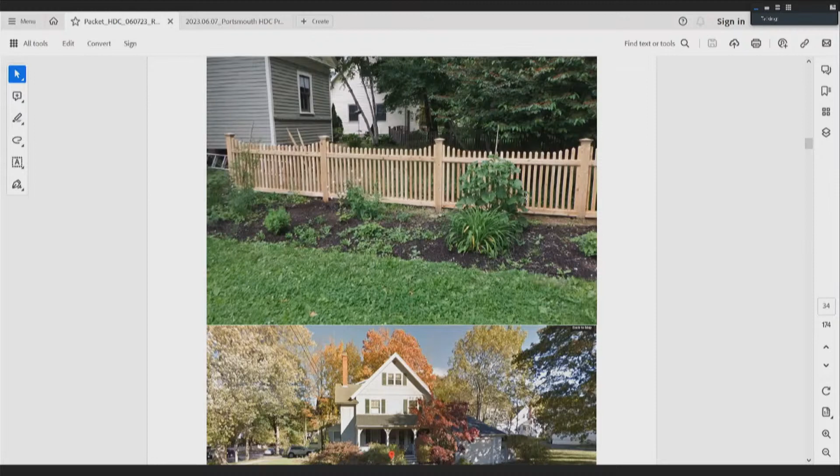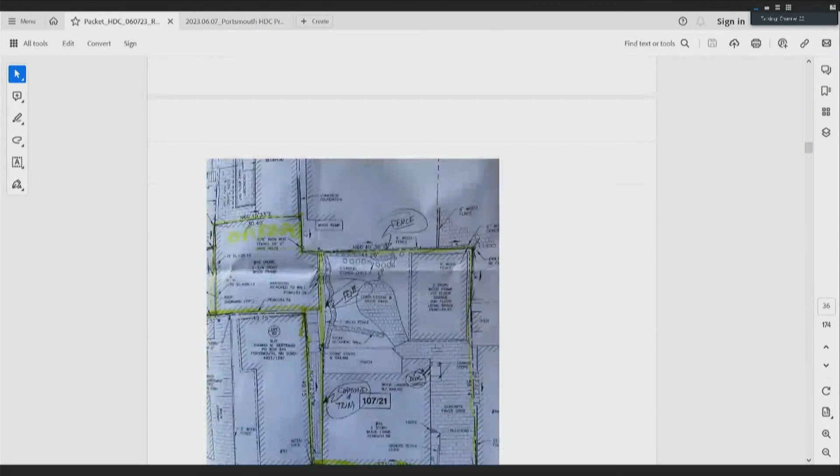Anything else? No. Okay, 49 Sheafe - I think the only real item on that list that requires approval is the HardiePlank on this side of the building, which is the narrow walkway between 49 and 43. I'm sure this door is being replaced, but I'm under the assumption it's in kind, given there was no alternative door shown in the package. They're replacing this broken section of the fence in kind with this tall picket style, but this is the cedar or pine clapboards on that sidewall that's within 3 or 4 feet at its narrowest, the building at 43.

Are they replacing those? No, they're wanting to put Hardie in there. Replacing it? Obviously, if you approve it, it should be smooth side out, I'm sure with the same profile. We should probably stipulate that. Yes.

The only other thing I would note is, we looked at the installation of some HardiePlank up on Prospect Street, and the installer did not do a very good job of randomizing - no running bonds, everything butted in. So if we could ask for a little bit of attention to detail to be paid to that. Will they be able to match the width? Because the exposure is tight currently. Why can't they do that? Hardie is usually 4. Because it's blind nailed - it's nailed at the top of the HardiePlank.

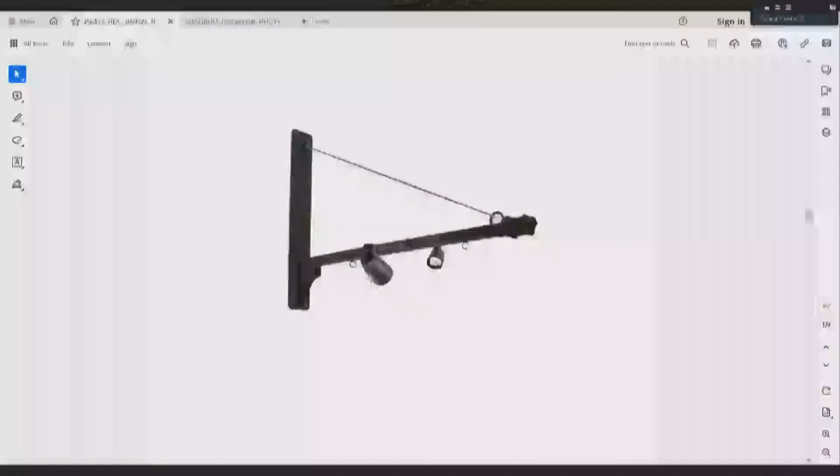Apparently this is a showroom for cabinet makers. I'm glad to see something finally going in there. Very interesting, it's sat so long, six years, nothing.

All right, I think for 135, Daniel, unless somebody's here in the audience for that, we should continue that to next week because I had requested an indication of where that vent is actually located, and what it looks like. I don't see it in the packet.

So 172 South Street is another mechanical condenser to get down there. I believe this one is proposed to be here underneath the existing stairs behind the lattice. Presumably they've already had that okayed by the plumbing inspector, but that's the location, on the side of the house here, and it'll be covered with the same lattice.

We'll write that down. Okay, that is 8.

Number 9, 11 Market Street. This is a condenser again on the back of this building with a conduit running up the brick in this alleyway that very few people see.

So presumably it would be conditioned to be painted the color of that brick wall. Yes, that's being replaced. So that's number 9. Sorry, take your time.

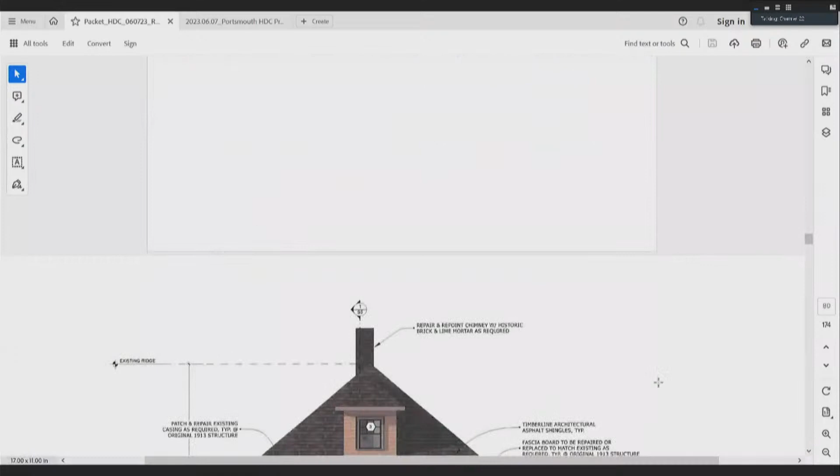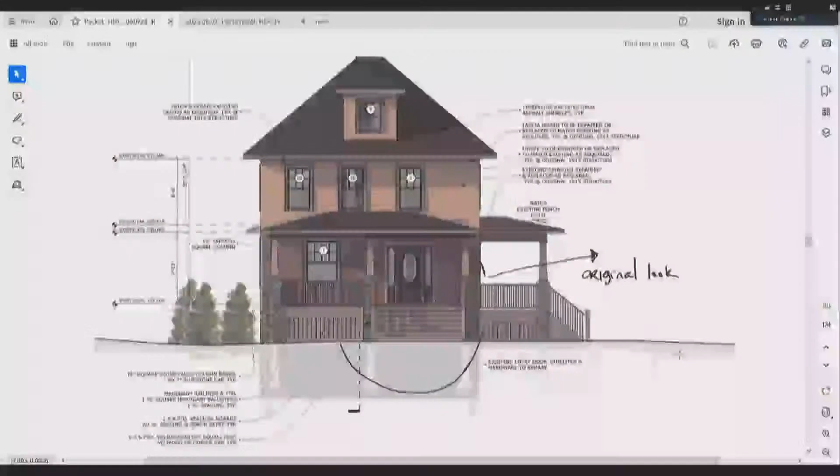All right, 28 New Castle Ave. So this project was recently approved with a lot of moving parts. They had a few stipulations to come back seeking administrative approval for the location, they're proposing to relocate the HVAC equipment, modify the stair design, the stone veneer, and use cedar shakes on the building, to follow more the original look of the building.

Is anyone here for this? Yeah, perfect. Anything to add? Hi, I'm Erin Barber, homeowner at 28 New Castle.

So as we've gone through the project, we've wanted to make some tweaks, and just wanted to come back and walk through those. The first one is the design, or the width of the stairs on the front.

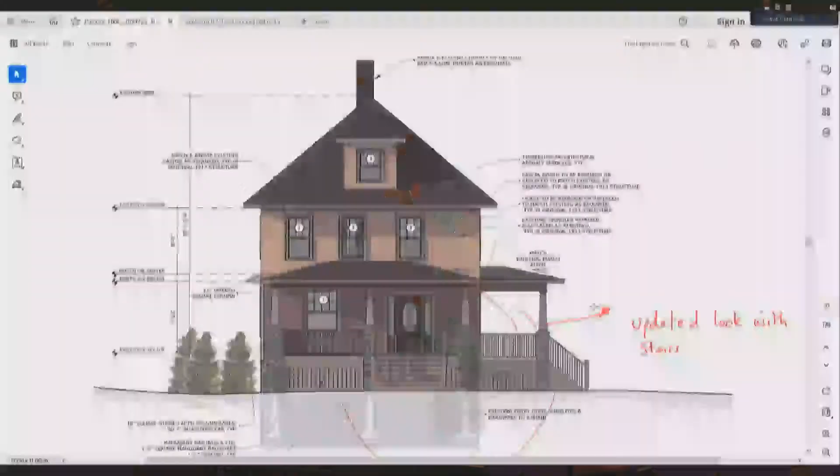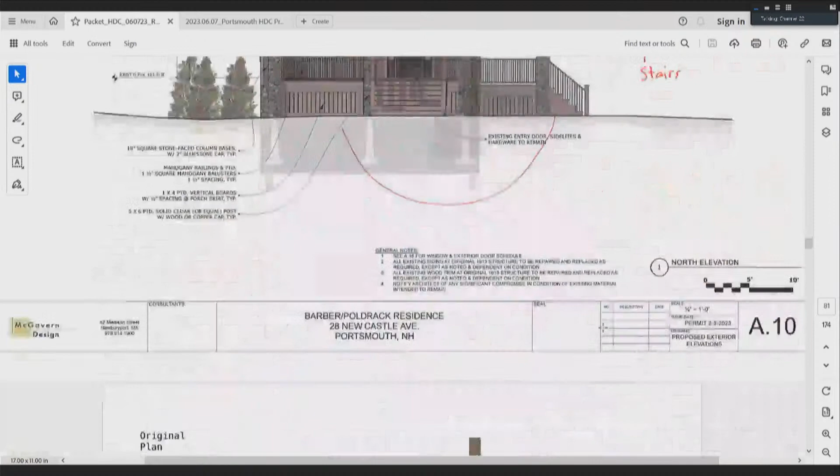The second change to the plan that we mentioned in the packet was actually needing to move the condensers because they were too close to the gas line in the original plan that we submitted. However, we've been going back and forth with Unitil to see if there was anything they could do. They sent out a tech today and said it would be fine, and that after the condensers are placed where they were originally in the plan, if there's any issue, they'll come out and move the vent line or something like that.

So it seems like we actually don't need to make that change, and the original location will work. Correct, that's the original location that was approved in the plan. Lots of dynamic things happening in a project like this.

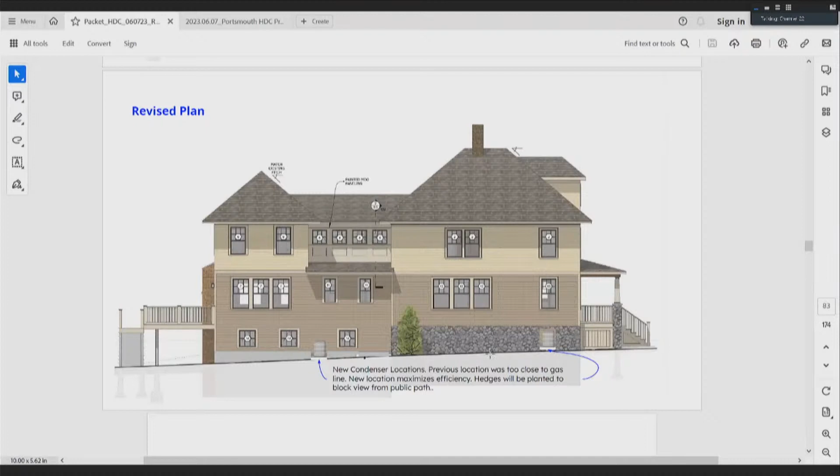And then you had asked for, before we proceed with the siding and the stone for the pillars, that we come back and talk about the materials. We've been talking to several masons because our original idea had been to basically recreate the look of the basement skirting with the field stone, but that's not been practical according to anyone we've spoken with, so we are going to use a field stone veneer for that.

And then in terms of the siding material, we will be using a cedar shake on the top of the house and a mahogany clapboard on the bottom half of the house. So just wanted to see if you had any questions on that.

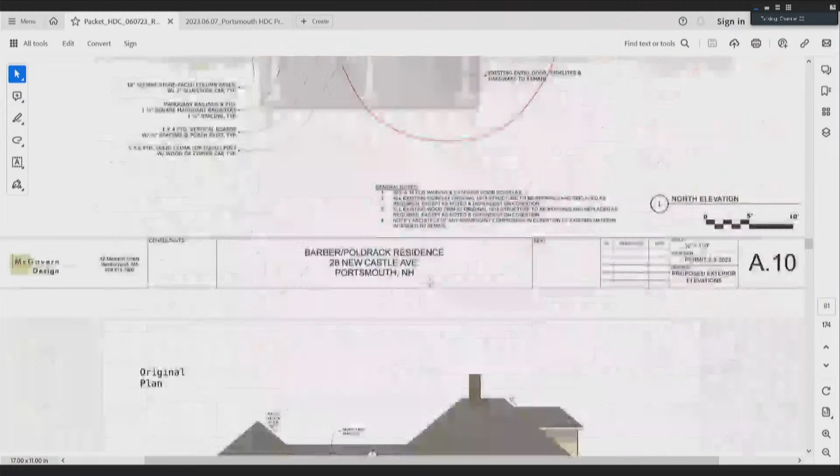So this section down here is clapboard, proposed to be clapboard? The darker brown? Yes, okay, yes.

Dave, what are you doing to the stairs? I can't see it in the pictures. The difference, would you mind going back? I can, would you go back to the first one? I'm sorry, you have to walk over there. You gotta bring the microphone with you.

In the original proposal, the stairs and front door were offset from each other. They've straightened it up so the door sits pretty much in the middle. We've just moved this over and created a new baluster there.

So on 28 New Castle, are we keeping the condensers where they used to be? Yes, okay, fine.

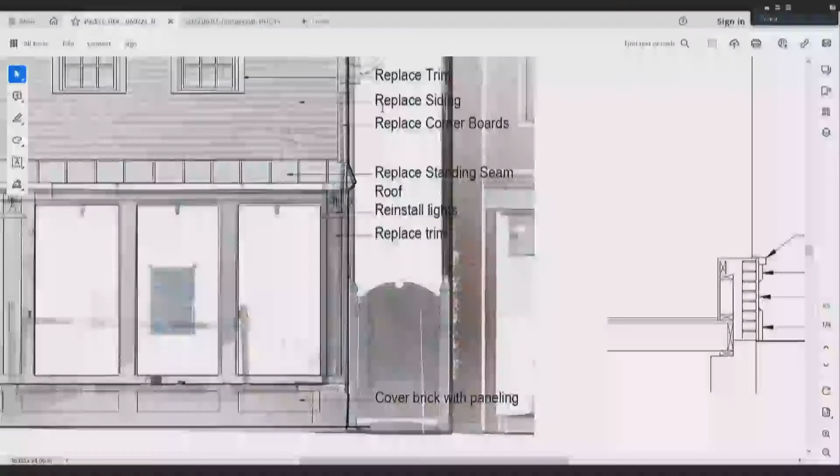50 Daniel was recently approved, and there was a condition on the original approval for the base paneling on this building that they submit a cross-section of how this storefront's going to work. They're going to replace the standing seam, reinstall the lights, replace the trim, and cover up the brick with paneling. There's a cross-section here showing the PVC panel with trim and a panel mold, and the historic sill. That's what we didn't have enough information on last time.

How do people feel about that treatment?

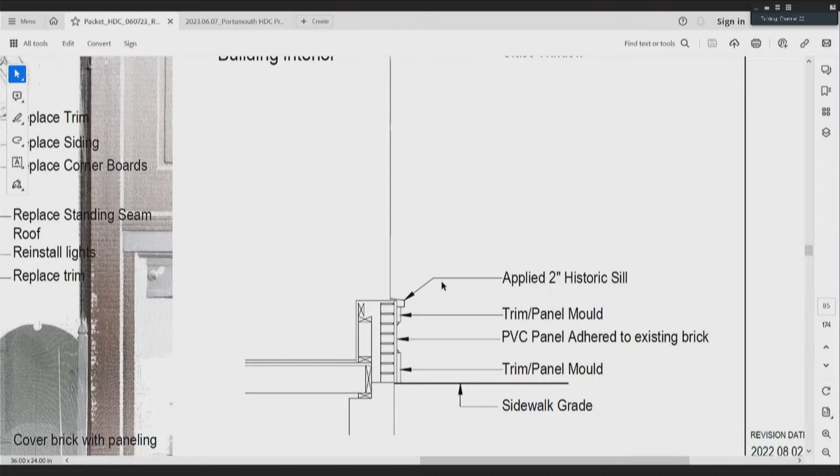I believe that when this building underwent renovations 30 or 40 years ago and was made into the storefronts currently existing, the brick under the windows was installed at that time. David, you're the historian? I don't have the exact date, but obviously the brick is not original to the building, and it certainly fits in with the large window panel construction, so that makes sense. And it's a wooden building.

The last two, 60 Penhallow and 111 State Street, are I believe the same lighting fixture. This is sign lighting for 60 Penhallow - here's the sign, here are the lights underneath it, here are the fixtures, and there's the light itself. It's the same for 111 State Street - sign and then the lighting, same light.

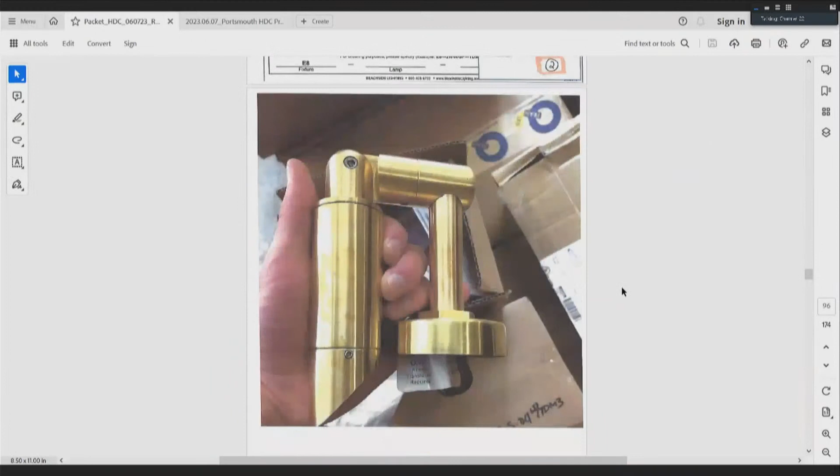So are these lights just for the sign? Yes, as submitted anyway. Are these, we have pictures of black and pictures of what appears to be metallic - is it the metallic? I believe it's the metallic.

Okay, that's it. Warning sign, take out window. So the only one we're taking out to next week is number 7. We've done number 1 and we've done number 4.

So we need a motion to continue number 7 until next week. So moved. Second? All those in favor? Aye. Against? All right. And then I move to approve administrative approvals 2, 3, 5, 6, 8, 9, 10, 11, 12, 13, with a few stipulations as agreed, as written. Seconded? Second. All those in favor? Aye. Against? All right, thank you very much.

Nick? So, notice how polite I've gotten.

Okay, so you did provide me a jump drive. Is that useful for just the parapet, or do we just pull up one of these slides? No, you can just pull up one of these slides from the package you have here. I think between sheet A200 and DSK 01. So A200 - there you go, that's the one you want. So there you see elevations, and in the following sheet you'll see a detail of that parapet's construction.

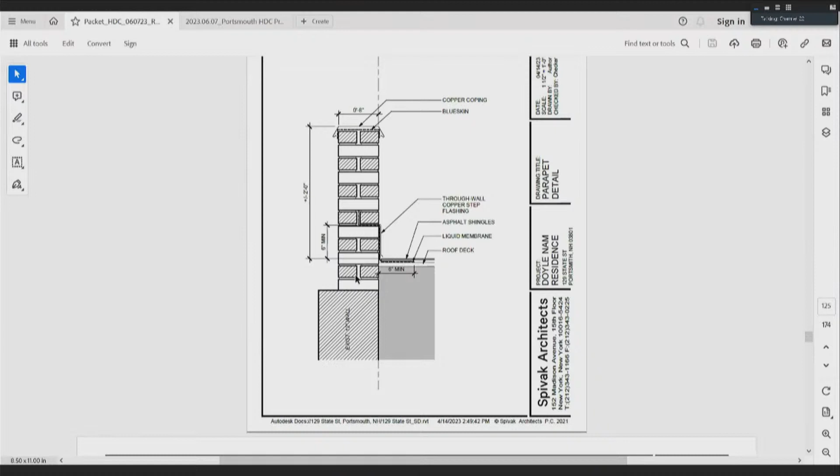But this is the parapet here, if you can see the mouse, right? Correct, here and here. Okay, and so if you jump ahead one sheet, what you'll see is the masonry extending up on the 129 State Street side, coming up approximately two feet following the slope of the roof, with a copper coping at the top, step flashing in the adjacent roof.

Okay, so everybody again, just to reiterate the obvious, this is essentially the only sheet you're referring to in this potential approval or vote. There's no implied approval of any of the other changes shown on these many sheets, just to be absolutely crystal clear. Correct, we were just talking about the parapet that extends up from 129 State Street's existing wall up through the roof.

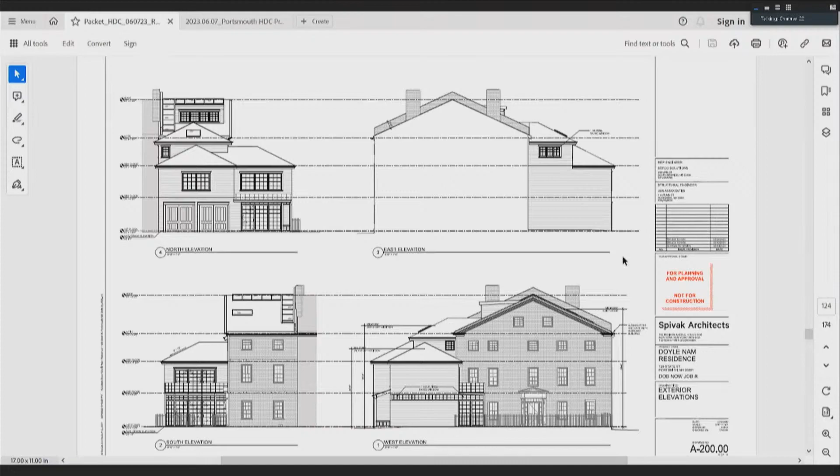I have a question, just out of curiosity - how are you finishing this wall next to the existing chimneys? So as far as termination goes, the elevations will kind of show you how both the chimney on the Sheafe Street side and the State Street side are integrated. The chimney on the State Street side actually sits upon both properties, so the parapet would butt to that, and same goes for the chimney on the Sheafe Street side.

I was just curious, I didn't know if you would be putting anything in between for protection or anything like that, but that's fine.

Okay, Martin. Typically you'd put a masonry stone cap on this, and you're going with a very small metal copper cap.

Not sure, I'm not too hung up on it, but I'm not sure it's appropriate. And I'm not sure how it's going to be held down. I don't see any clipping system or anything. If it traveled down the wall just a little bit more, it could have a clip that's part of that last course, and it could tie in. The constructability is probably what I'm getting hung up on.

I think what I'd like to do is have Howard step up here, and he can explain some of these details a little further for you. We'll definitely be having a clip, and the detail, we can revise it to show it better.

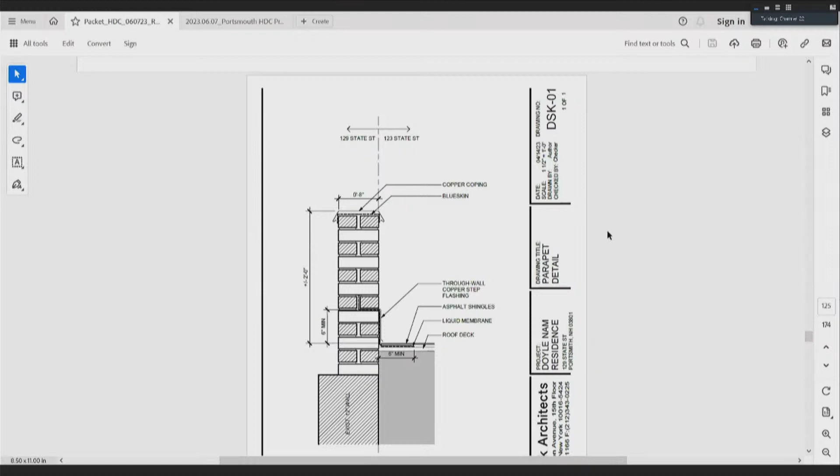If it came down and looked like a stone cap, I think it would probably look a lot better. We did the copper because we thought it would be simpler and clean and minimize the view from the street. We were open to the stone, but we just thought stone would make more of it, especially after the hearing when there was a whole discussion of stone above the windows. We thought keeping it all in the brick with a thinner line of copper was more in keeping with the aesthetic of the historic structures.

We're also open to the stone, we can also do stone. It was just that we thought the copper was more in keeping.

Understood. So I have a question, unless somebody else - did I see another hand? My question is concerning the roof flashing. You only show it on one side.

How is that working? That becomes part of the discussion at the working session with the details that come at that time.

I don't understand that. Well, I think what I'm hearing is they're presenting the brick parapet design. It's seemingly obvious you shouldn't vote on it tonight unless you have good answers to these questions like the flashing. If it's going to be discussed in the work session, it's going to be modified by the sounds of it.

The detail - the work session is next month. Well, you're right. There will be a flashing detail, similar to the flashing detail on the 129 State Street side, but it depends if we get what's in the revised plans approved in the later hearings.

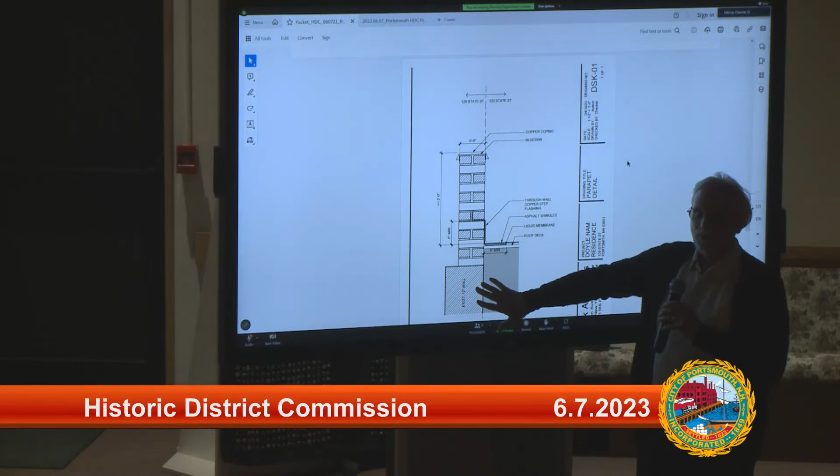This wall here is the wall of the house of 129. This line here represents the wall of 123. So it's not a party wall — they're two separate walls, two masonry walls.

Also, if you go by the street and look from State Street and Sheafe Street, you can see a 1/8 inch to 3/16 inch line going the whole height of the building, and you'll notice there are two different brick patterns.

I'm wondering if there's any evidence that you might have seen that there was a parapet at one time here. I can't for the life of me, after the great fires that Portsmouth had, figure out why there wasn't parapets in between these individual houses.

Has anybody been crawling around up there? I don't believe there was any evidence, after spending some time in that attic space, that the wall had ever extended above the roof. But you were only on your wall, not the other side, right? Correct — the other side might have had a parapet.

The other interesting thing is the chimneys are shared, but they tend to be a portion on 129 and a bit deeper on 123. So it might have been that 129 was built first and then 123 and 125 were built later.

Just being curious, that's all. Thank you. Any other questions?

So would anybody in the public like to speak on this?

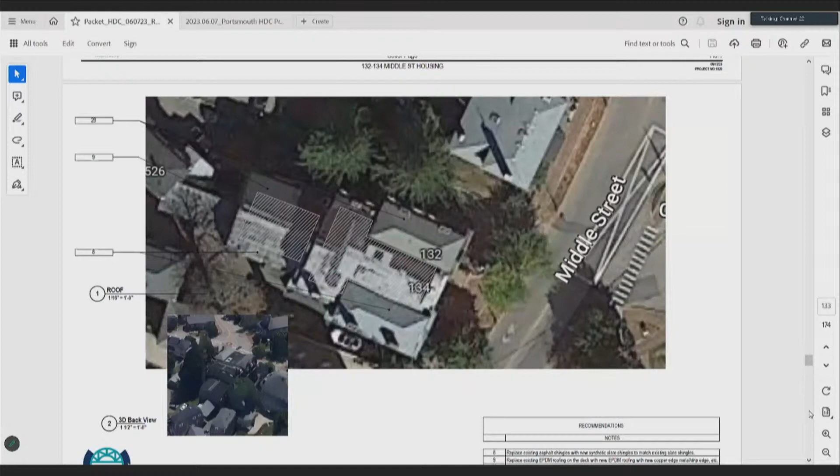I think it's important to note, if anybody is listening, that this has gone through our board 4 or 5 different times, so I think we're all pretty familiar with this building.

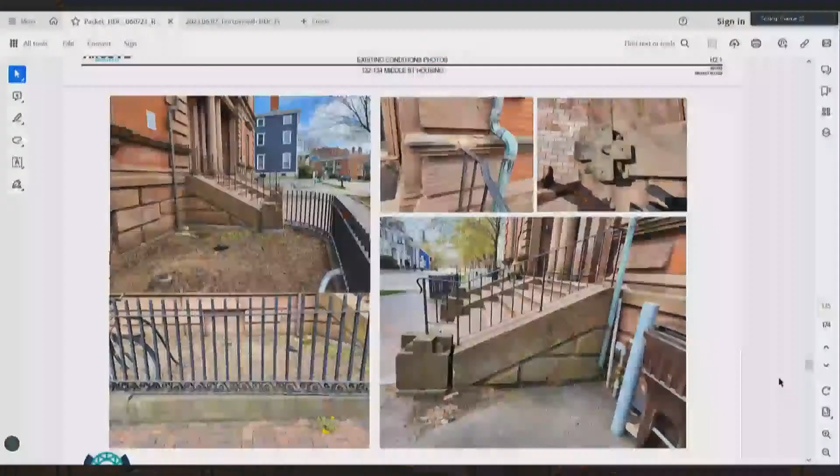The biggest thing is the steps. The brownstone, as you know, doesn't hold up well in this climate, and it has chipped and spalled and fallen apart. So we're proposing to keep the side walls, the cheek walls of the stoop, but just replace the treads and risers with a colored concrete, custom colored to match the brownstone, of which I have a sample.

So this is the custom colored concrete, and this is a chip of the brownstone. Happy to pass this around.

Same profile as existing. This is a pretty standard way of replacing brownstone. The colored concrete is the brownstone replacement only on the steps, not on the face of the building. The face of the building is a brownstone mortar patch repair. We have the specs and cut sheets at the back of the packet, and there's also a photo in the front here that shows a test patch we did.

Tracy, one of the big discussions and one of the big holdups last time was the question of the slate at the top, given that there were 2 different designs, some asphalt roofing that had been put in at one point, and whether or not the trim along the corners would be mirrored and replaced. So if you could address that, please.

That's not brownstone, huh? I thought it was. It's a different color and texture than the steps. Yeah, that's brownstone - is it brownstone? It is. So that's in good shape. It is in good shape. Yeah, we're not touching that. You'll never see that, we'll clean it.

We're putting in new railings. We have details of those in the packet. That's amazing if that's in such good shape, though it doesn't get the wear.

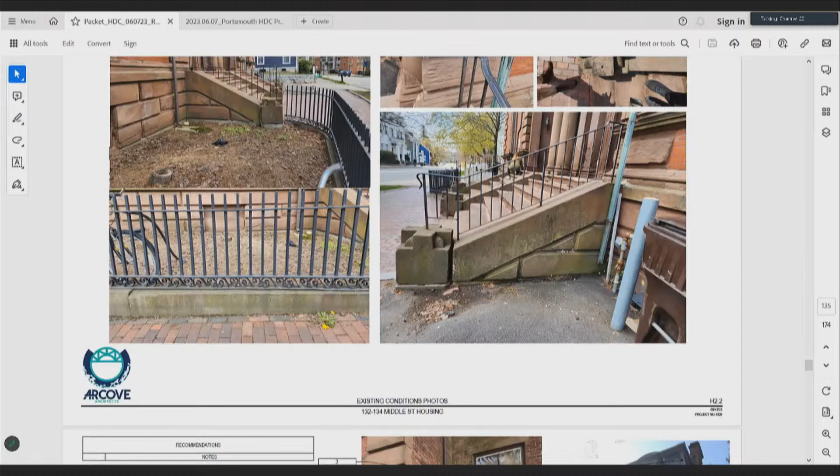And the nosing, there's a little bit of trim under the nosing, to match the existing, cast in place. So somebody has brought up an interesting question.

Why is this EcoStar rounded when all the others we've seen in the past have 45s off on the corners? Well, no, they're rectilinear, 90 degrees on the corner. They offer a variety of shapes in this. This is the Majestic line, so they have pointy, square, octagonal, beaver tail.

So I have a question: in the 19th century, would you ever see a shingle that looks like this? I wonder if we're trying too hard to get something that doesn't work, and whether it'd be better at 90 degrees like you'd routinely see in the 19th century, given it's a focal building. I'm just throwing that out there.

It seems like a big departure from what you'd have seen on a building of this vintage. Are we suggesting the scallop shapes you see are not original? No, I'm suggesting the scallop fish scale shingles are about this wide, and this probably doesn't exist anywhere in the United States in the 19th century for this shape. It may be fine three stories in the air, but it's going to be something not authentic to the building or any other mansard from the 19th century.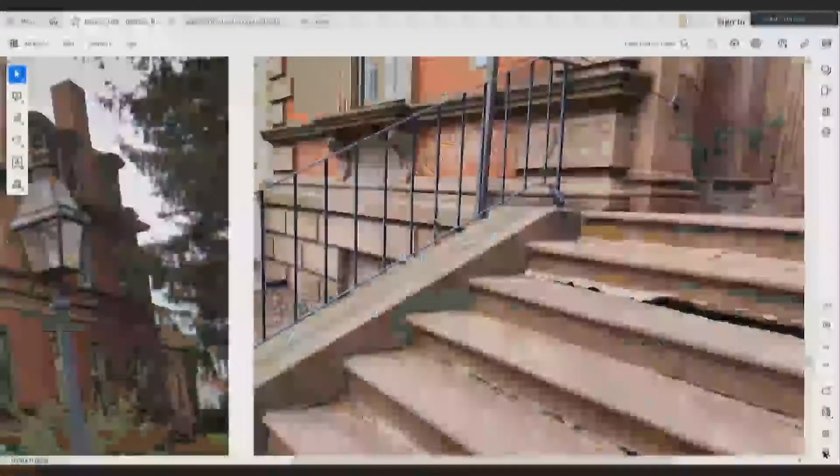Actually, it was this part right here that gave us a lot, didn't want to rebuild. The ironwork, that's all going to be wrought iron? It's custom wrought iron. Excellent. And we've done the detailed drawing, that's what's there now, put in mid-20th century.

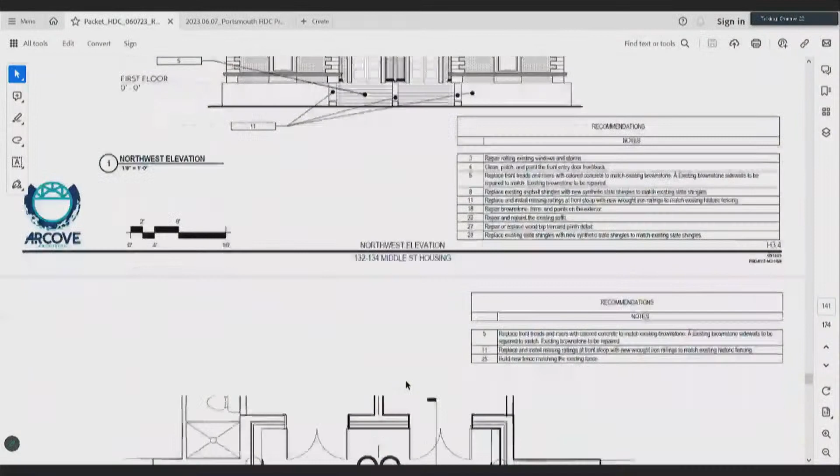They're different on either side. The one in the middle is missing. There's evidence on the bottom plinth stones that there were 4 bolts anchoring the post, and there's one section of original fence on the left side of the building which has the 4 bolted posts. So we're going to replicate that post detail at the bottom of each of the 3 cheek walls.

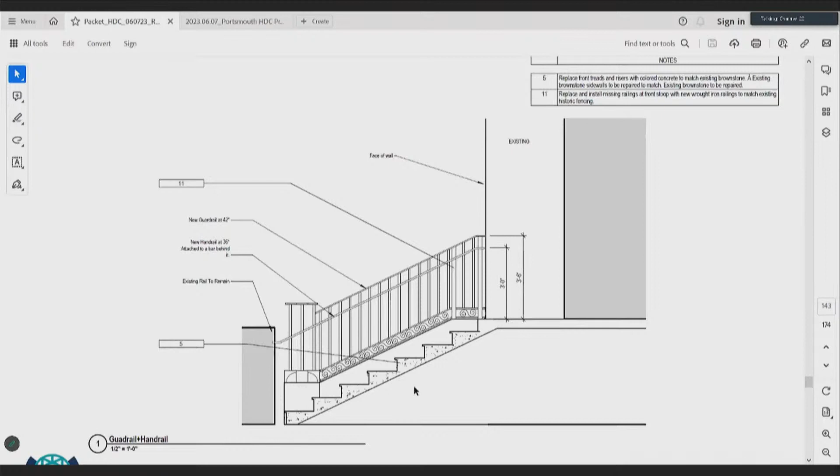The cheek wall in the middle just has a handrail, not the pickets and scrolls. The ones on the sides have the pickets and scrolls to match the existing detail of the fence. The only difference is the fence on the road just has the picket points open at the top, and we're putting a cap rail along the top so you don't hurt yourself.

We're fastening it into the cheek wall and the plinth. The railings that are there now, unfortunately, at the top, they were bolted into the brownstone, which led to further brownstone damage.

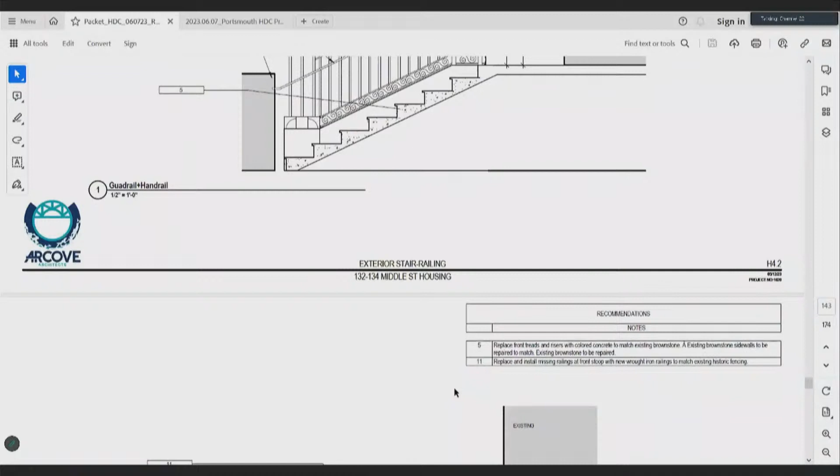There's a new fence on the front edge of the property on the right side. Currently, it's asphalt, no fence, and garbage cans. That will be landscaped, with the garbage cans moved out back and a new wrought iron fence in front.

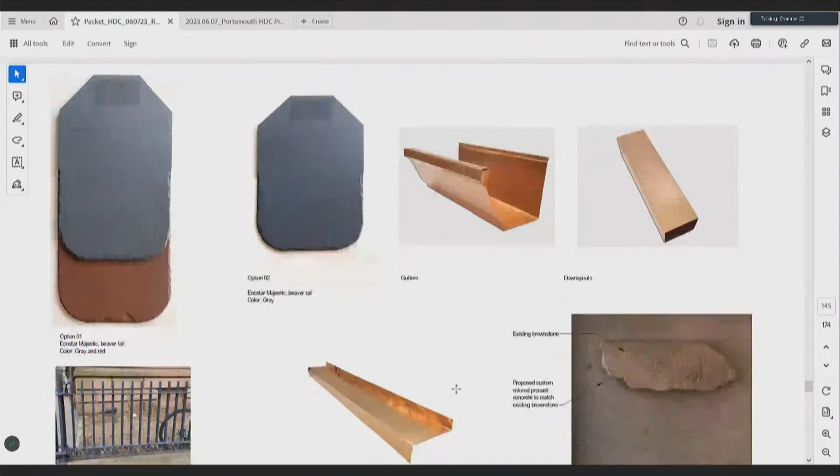Tracy, the modern cement side entrance over which you're going to be doing some roof work, what's going to happen with the old steel aluminum rail and the cement? No changes to anything out back, just if it's loose, it will be secured, and if it needs cleaning or painting, it will be cleaned and painted. Similarly, the windows are just being reputtied if there's missing or cracked putty, cleaned, not replaced. Nothing else is being replaced.

The gutters are being replaced. I brought samples of that. You're asking about copper gutters before—there is a difference. The gutter profile is the same as in the packet, but for the downspout, we'd like to go to a round instead of the rectangle that's there. It's just mill finish copper. The hangers, got all the accessories here, and flashing—that's a kit.

Will the gutters follow the existing pattern down the side of the building—exactly where they're placed now, or will they be moved in any way? The downspouts, well, some are missing. On the driveway side on the right, you can see a hole coming down through the soffit where there used to be a gutter, so we'll put one back there in the corner, but we're not proposing any new locations.

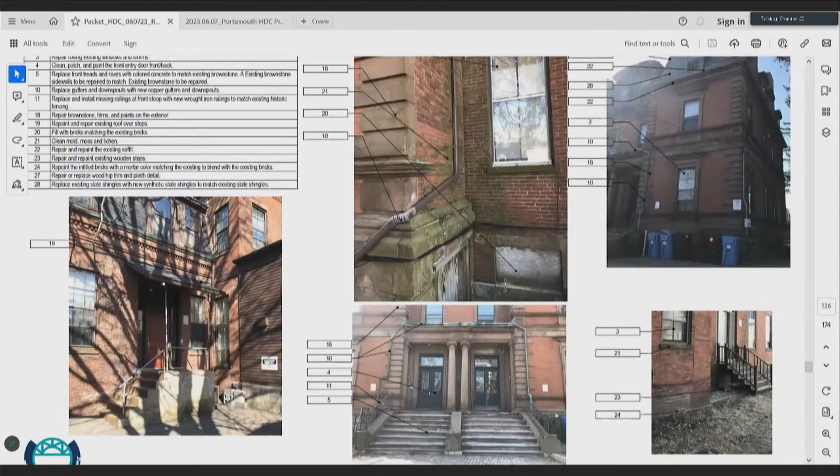I just don't see it. Towards the end. Almost at the bottom there. Second to last page, third to last. Yes, second—page 25.

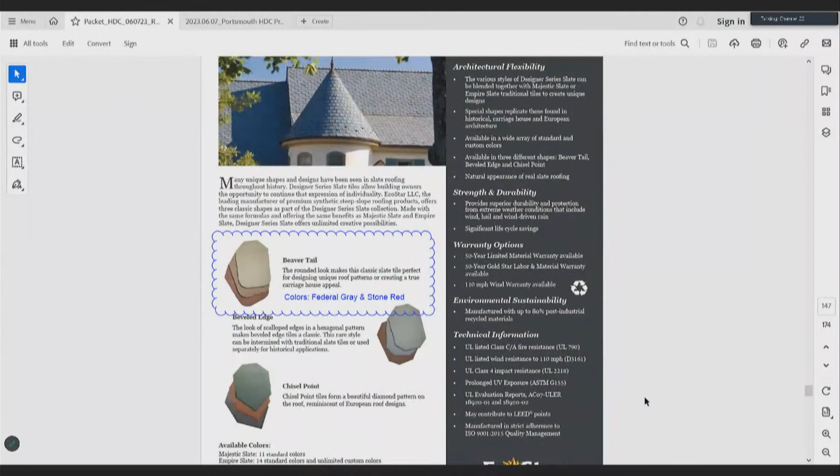There are 2 colors here, K8 and K10. K10 is way too dark, won't be using that. K8 is a touch dark. The objective is to get a perfect match by using the color blends that are needed.

K10, K8. Oh, thank you very much. You know, somebody's done a little homework on this. Thank you.

So it sounds like you were really committed to a nice restoration on the front of this property. It's primarily a masonry exercise, given the amount of work needed—the brick's not so bad, but the brownstone is a whole other thing. It's being undertaken with a custom reproduction effort, with everything custom matched—the brownstone, the wrought iron, the copper—and trying to get as close a match as we can with the roofing shingles as well.

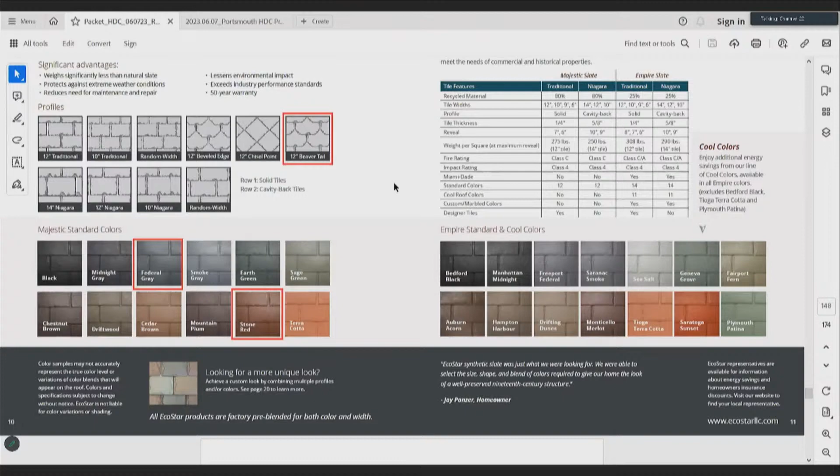Thank you for your input and guidance. Hey Tracy, not to beat a dead horse here, but looking at EcoStar's marketing material, all the shingles at the very top of this cone are much narrower and more aligned with the existing character of the building than the stuff at the bottom. So I'm curious whether this was just a Photoshop thing on their part, or whether they actually sell the top half of the cone.

It looks like they custom scaled all the pieces—you'd have to, right? We could arrange to reshape them. It's worth asking. We could put up a ladder and you could go measure the width of the existing ones. Actually, I was thinking I could probably lean out a window on the third floor a lot easier, but I'd certainly be interested in doing that.

I'm very concerned about getting this building right. I understand the challenges of trying to get it done as a repair project with modern materials, because when this was built, no one had an eye toward what they were going to do in the future—and that's a damn shame, and that's why it looks like this now. I think what you're proposing sounds terrific, and I can't imagine anyone on the commission having any issues other than wishing you well. But at the same time, I'd hate to think there were a couple of subtle little things we missed when we have an opportunity to get it better.

Just to back up, because this is a public hearing, the existing house is a historic cape dating somewhere around 1700 with an existing kitchen that faces towards the water. It does have an existing little mudroom that's sort of falling down. So in our proposal, we are proposing that the mudroom be replaced by a glass breezeway that connects to a low short colonial, as well as a small bump out for a mudroom off the existing kitchen.

So in our work sessions, we have landed here, on this addition that does house modern living. On the first floor is a family room with a staircase to a primary suite on the second floor.

Right now there are existing doors to the kitchen with French doors, and so we're replicating those in the colonial as well as in the mudroom bump out. Then there will be 3 windows above that, replicating the 3 windows in the existing kitchen. That's the kitchen sink.

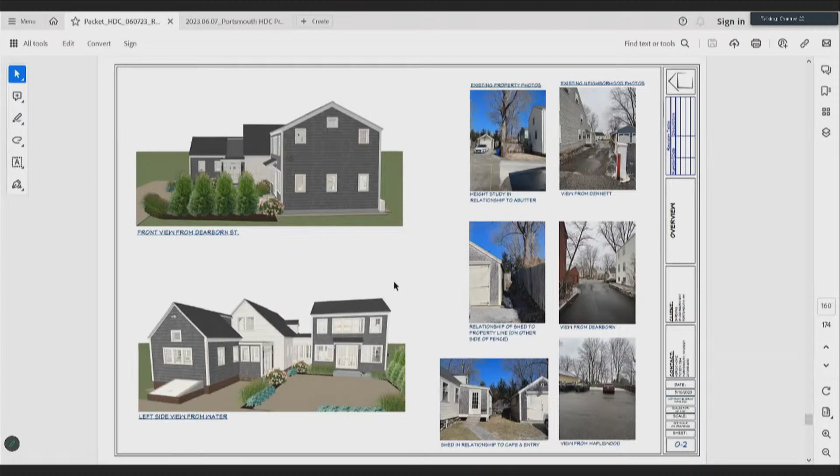The windows, we did change the scale from our last work session. The windows are actually all smaller on the first and second floor, and actually larger on the gable end. I think there was some comment and conversation about that.

The windows, we did discuss the 2 windows that you're seeing here in the mudroom addition. Those are the exact same size as the kitchen gable windows on the other end, as well as the windows in the existing dining room.

The windows in the existing house on the second floor will be replaced for egress windows, and on the first floor in the dining room those will also be new. It's not really a full window schedule, but this just shows we're using the Marvin Elevate windows.

The other significant thing that we did was to take off the chimney that was on the right, that I think most of us felt was out of scale, throwing pretty much everything off. So we just removed that and went with a gas fireplace.

And lastly, we did change the size of the well egress. That doesn't really impact this board, but nevertheless, just so you know, that did happen.

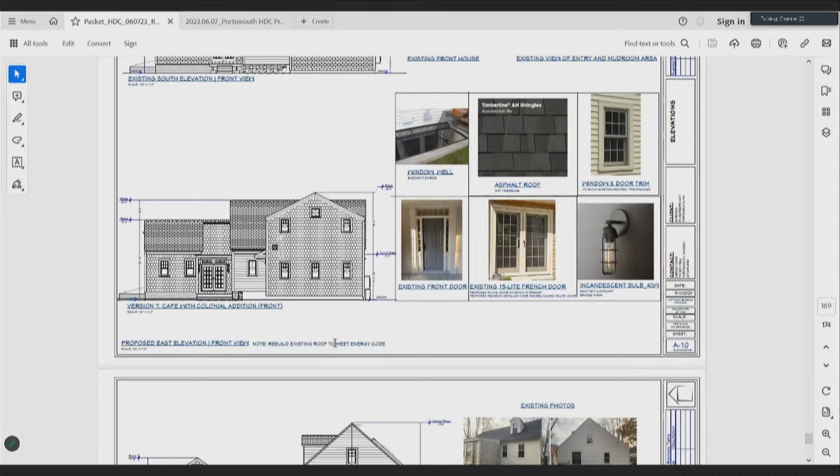We did receive approval from the Board of Adjustment, I guess a couple weeks ago. It's kind of a blur between all the meetings, but since we've last seen you, we did receive BOA approval. So all of that has been approved, meaning the chimney and the window well.

Regarding materials, we are proposing, for the most part, to primarily match what is existing on the Cape, as far as scale goes, mostly replicating the kitchen. The existing Cape does have vinyl siding, so we're proposing that be removed, and we will be going with Hardie. I have samples of that.

And where you see shingles, those will be Maibec, and both will be painted to match each other. Then the historic sills on the historic Cape will be replicated in anything new in the addition.

The other thing I wanted to point out about the windows, going back a little bit, is the existing historic Cape will be a 2/1, and then we'll go with a 6/1 on anything considered modern living, just to more or less highlight the Cape, as well as a different siding.

And then we are proposing AZEK trim and panels. So in the connector, there would be raised panels underneath the windows, and that would all be AZEK, no siding in that connector.

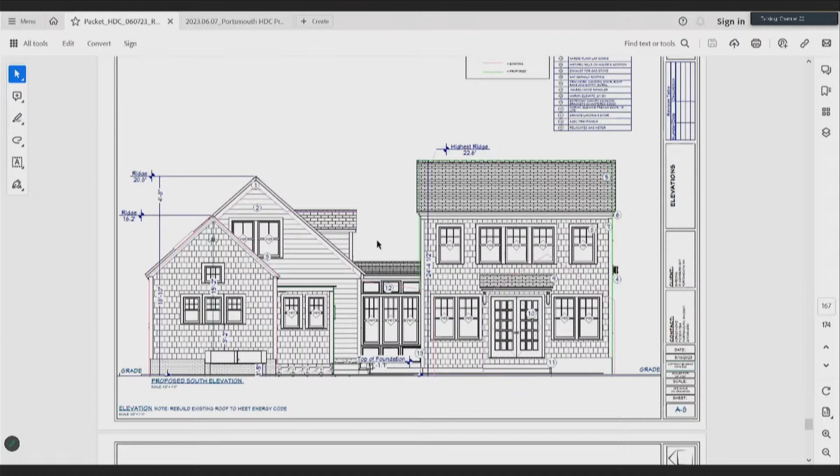I think that might be all I have. I'm sure you have questions.

Questions, comments? I'll just say thank you for all the work on this, and thank you to the owners for working with us on getting this through. I think this is a much more successful end game than what we've reached since the very beginning, and I think it's all going to work really well and be much more appropriate. Again, I appreciate that the Cape is still there and it's still visible, and you'll get all the things that you need in the new construction.

My only concern, and I don't really have any major problems, is the windows in that connector piece. I understand the language you're going for with the 6/1s being all the new stuff, but those are really narrow, and to me they look weird. I think you could probably go with 2/1 or even 2/2 there to break it up a little bit. You could shorten them, but I know you're trying to make it glassy and see-through, which I don't have a problem with, being that it's new.

All righty, oh there we have it up there. The dimensions of that are 12 by 20. Speak a little louder, Gary, please. Okay, thank you. Good evening. Nick, how are you? Good. The dimensions of that building are 12 by 20.

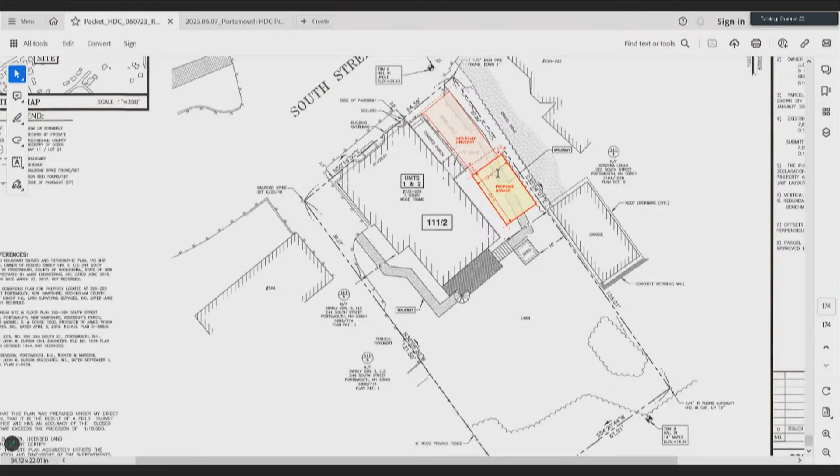And there it is, you can see it is set back about 20 feet from the road. It might be a bit more, about 25 there. About 20. Actually, Nick, you're good, I did measure it off the other day. It was about 26, 27 feet in fact. Can you put the picture back up? Yeah, if we scale it, it was about 27 feet. Okay.

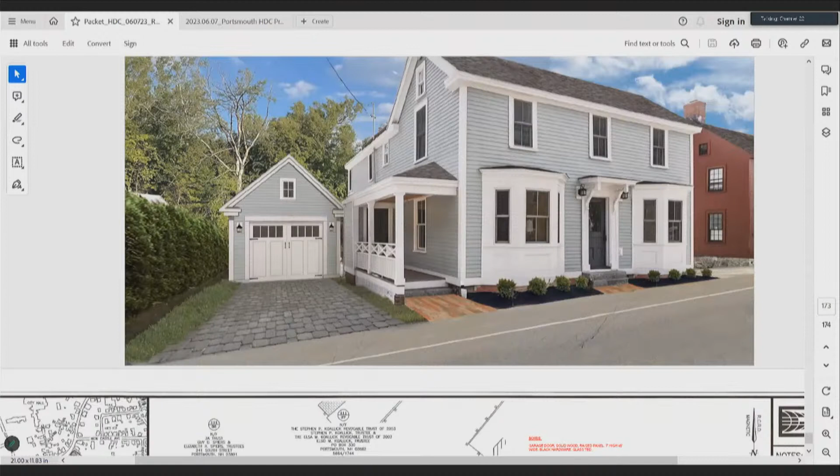Enough to fit a car here and have the car behind the front building facade. Correct, yeah. So basically, you're proposing a structure that mimics some of the detail of the main house. That's correct, same returns and eave lines, correct. Same builders, same contractors will be doing it, same siding, same corners.

The door is a standard overhead roll-up. Well, we're actually trying to go a little fancy. There's a company out of Barrington, New Hampshire, that makes custom wooden doors, and the architect pointed me towards them. I'm not sure about the lead time in this economy, but they make beautiful doors, trying to mirror our front door—it's like a 3-panel, so it'd be a nice solid wood door to give it a nice touch. Will it roll up or open out? It'll be a roll-up, electric door. As far as I know, they can make that door do that from the weight and everything.

They actually do make opening and closing hardware for doors like that. I like that, it's kind of more period, if you would. Better have your snow plowed, because the doors are... and it plows the front of your garage for you.

Are you planning wood materials, AZEK, Boral? What sort of materials are you thinking? Right now we'll probably be using all wood, 5/4 or 6/4 on the corner boards and water table, and pine, which is what we sided the structure with, 1x6 pine with about a 4-inch reveal. And similar asphalt shingles to match.

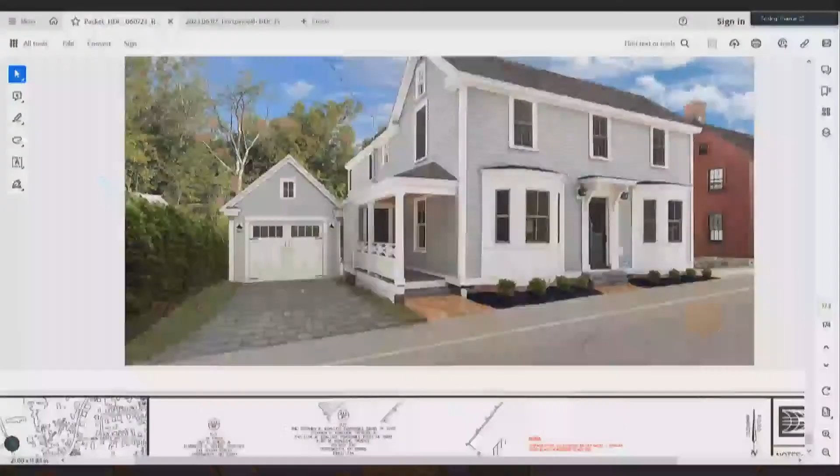Any other details you want to share? No, really, kind of simple. Any windows on the side that we can't see? No, there'll be just one, because on the left side it faces a row of arborvitaes, only about 24 inches, maybe 18 inches from it, and the house is fairly tight, about 3 feet on the other side. We will have a door you don't see.

On the right-hand side, going out the back, that'll lead you from the garage to the back porch onto your first floor unit.

No matching window on the back? You don't want a window on the back? Well, I think the door could be like a 9-light, which would provide us... that's what I was kind of envisioning, a 9-light door in the back.

Any other comments, questions? It looks like a textbook, this fits really well sort of thing. Whether or not it fits, it's a little tight, but the thing itself that he's proposing, I don't see any issues with it at all. I imagine everyone feels the same way.

Yeah, it's very simple, it mimics the same cornice going on in the house. Very simple, straightforward. I appreciate, at least as drawn, the trim you have around the garage door. You seem to have a piece of 2x6 or 2x8 for the top casing on that door, a little bit of a header there, that's very nice, it's very appropriate.

And then the side pieces will be let into it. Correct, and it'll be a very weather-tight seal. Correct. Spoken like a builder.

Well, we hire builders, we hope we'll follow that template. You really do. But we're happy with the guys, because these same guys had done that property over on Court Street, the pumpkin house, the orange house. And the same guys that did all that beautiful interior work, big difference, same guys are doing the work here. So we trust them. And you fixed the windows on the front of that building? Yes, at a great cost.

Holy money, that's what we said. But the truth is, we worked closely with Nick on that, Nick had some great ideas, he came through several times. And the people that love it, love it. We had the guy that bought the first unit there, he was just walking through from St. Louis on his way to Portland, stopped and walked by, saw the sign, said we'll take it, literally. The other people were from Boston, trying to find something in the Northeast away from Boston where there was a theater group for their son. Portsmouth fit beautifully for the son. They came up, looked at one house, that one, and said who do I write the check to. So we were lucky, and we got a lot of great ideas from the board on that one, and the people are still ecstatic that bought them.